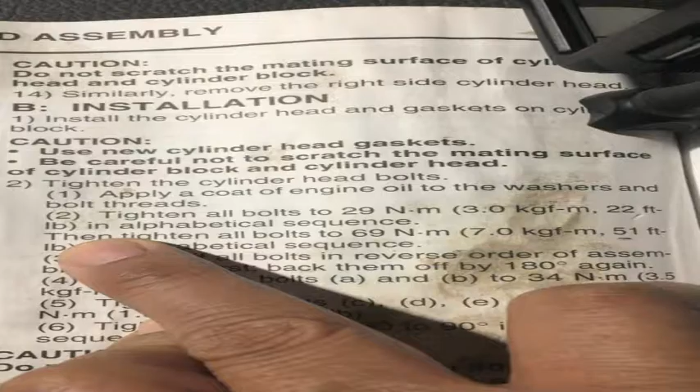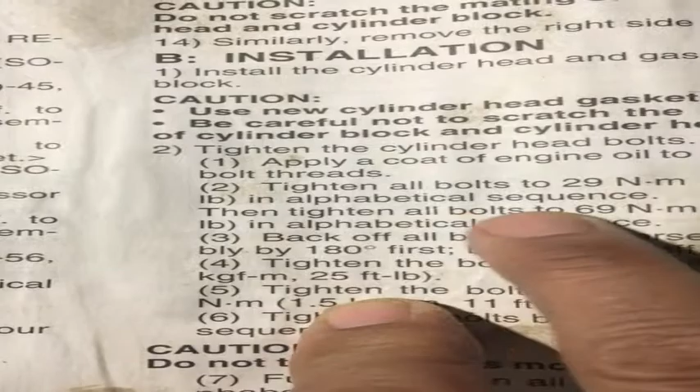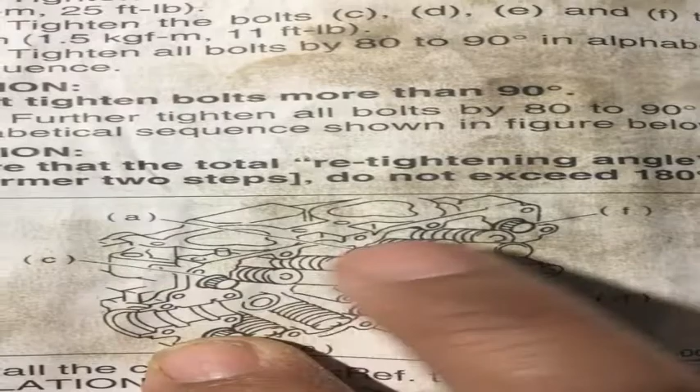Okay, so we've tightened them to 22 foot-pounds in alphabetical sequence, and now we move to the next step, which is tighten bolts to 51 foot-pounds in alphabetical sequence. So that's 51 foot-pounds. Okay. So this is again the alphabetical sequence A, C, and F. So there's 1, 2, 3, 4, 5, 6 head bolts,

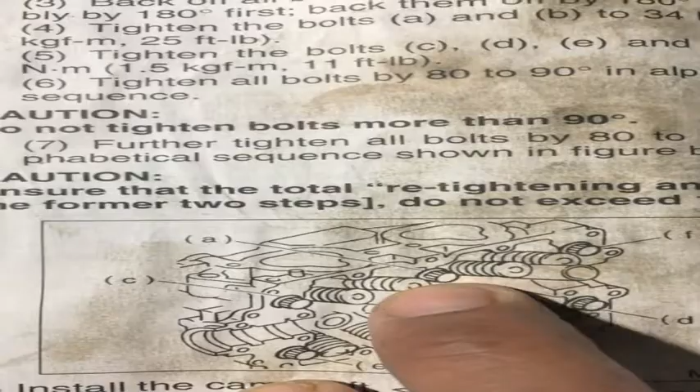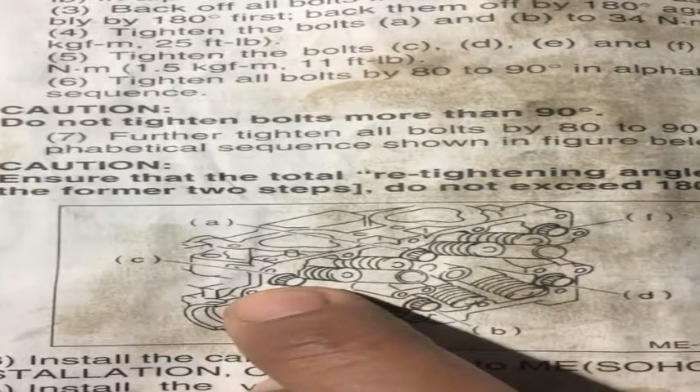12-point bolts. Okay. So there's A, and then we have B, from the top middle, bottom middle. Then we go to top left. Then we go to bottom right. And then you go to bottom left and top right. That's the sequence. All right, let's do it.

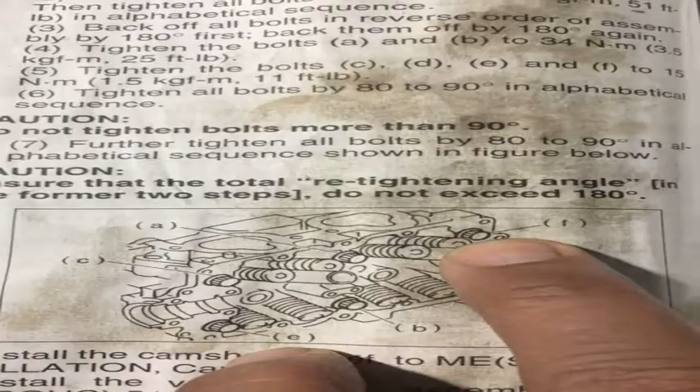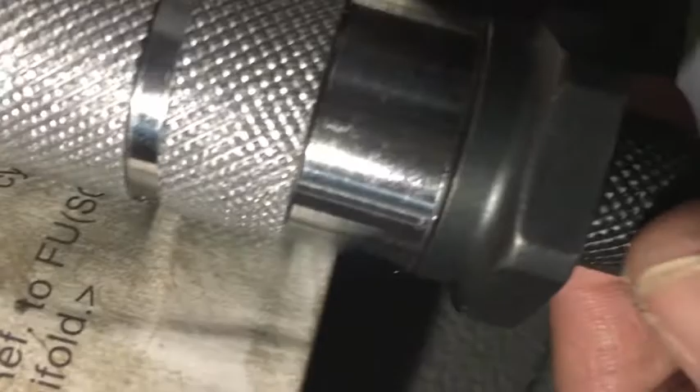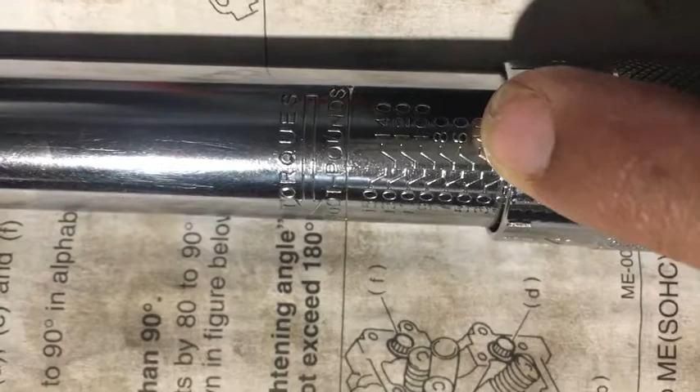51 foot-pounds. Okay, so we're going to adjust the torque wrench to 51 foot-pounds. And we're going to start by turning this little knob to loosen it. This way. Lefty, loosey. So we turn it this way. And then we're going to look for the 50 on here. And see here, it says 10, 20, 30, 40, and 50. So there's a line right there, and then it drops, and then it meets that center, this line right here.

So we're gonna run this thing up to right there, and it's gonna be at 0, and then we're gonna add 1. Okay, so let me do it and then I'll show you. Okay, so is that correct? It's a test for you guys. No, because it's not there. It's at 40 and then 9. So we gotta turn it a few more times until it's up to that line right there. Okay, I'll be right back.

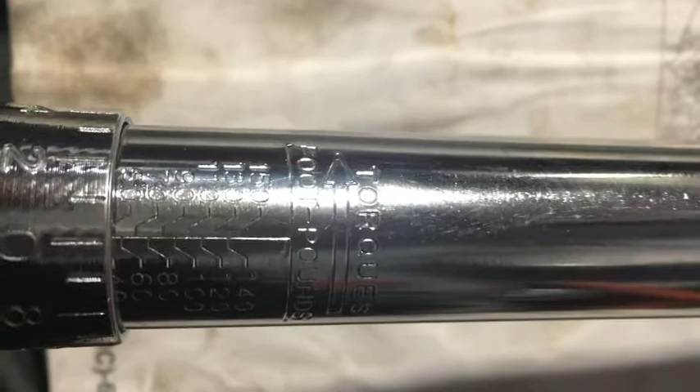Let's turn it. Okay, so are we there? Let me see. 50. And there's a line. We're right on top of it. We're at 0. So we need 51. So we're going to turn it, that notch right there, to line up with that line right there.

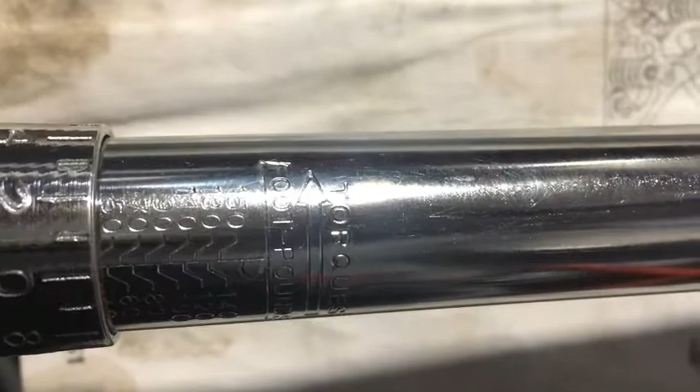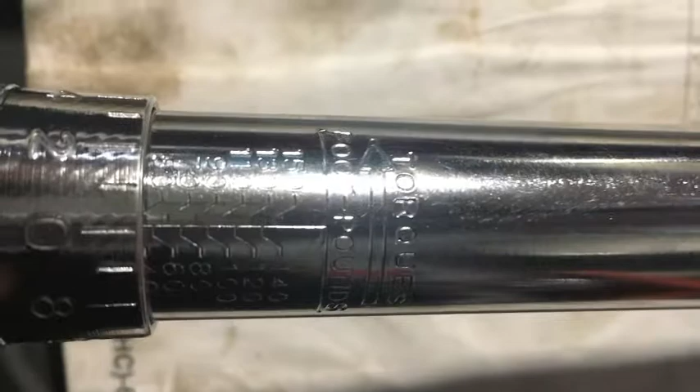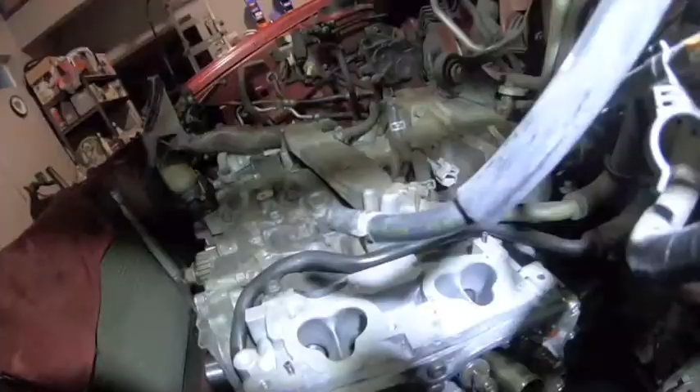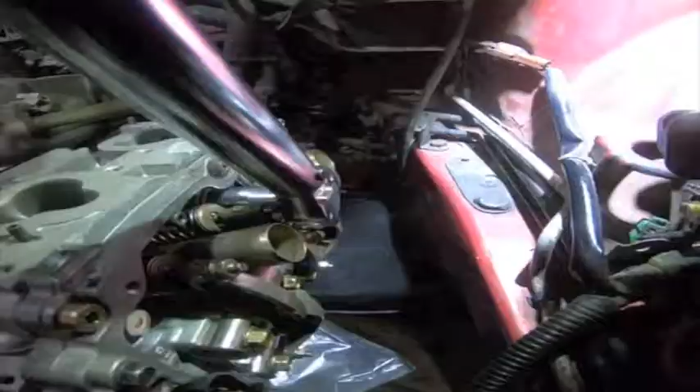Okay, so there we are. We're at 50 and 1. And now we can turn this way, to the right. I need both hands. To the right. Click. That's it right there. 51 pounds on A. Let me get an extension for the bottom. Extension.

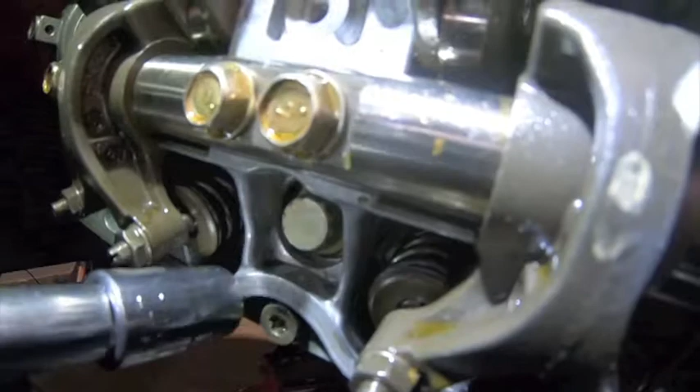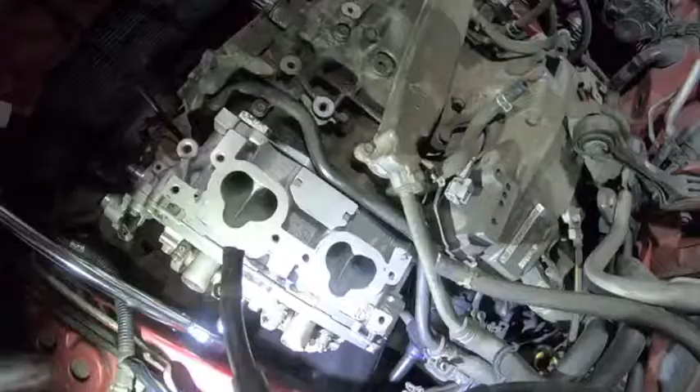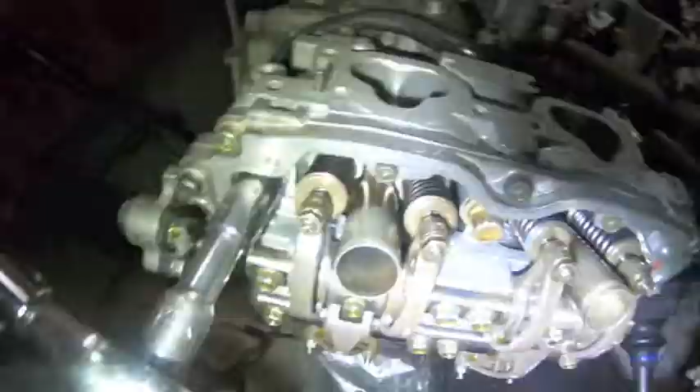Okay, now we're going to torque that, which is B bolt, to 51 pounds. And I'm going to need both hands. There's a click. Okay, so now we go to C. Upper. Here. Okay, that's going to be C. That red bolt right there. That's already at 51. Oh, no, it's not. There we go. Click. Okay, now we go to D.

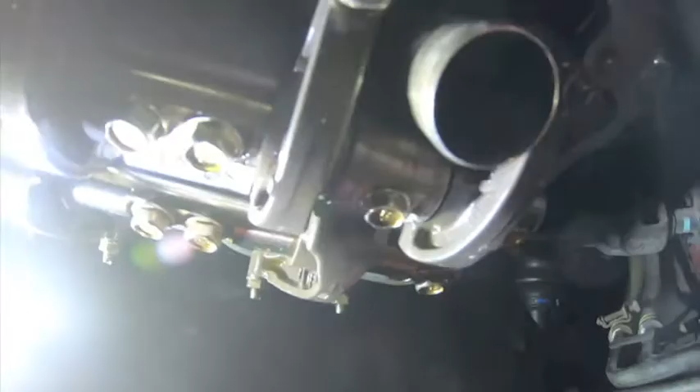Okay, now we're going to D. Right there. So we're right here. And we're going to the bottom right, which is D bolt, that red one. Trying to get the light right there. Okay, we're going for that D bolt, which is the bottom right. I can't use the extension. Okay. Here we are. And even though you can't see it, I showed it to you, it's that red bolt.

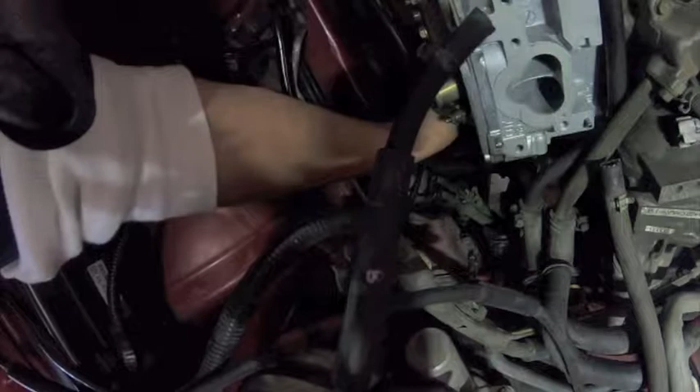Not a lot of room here, but making it work. Okay, we're almost there. I wish I could use an extension, but there's no room, so let's see. It's down here. It's just by feel now, because I can't see it. And it's right here. What happened to my little light? Oh. It's all by feel. Like that. Think we're there. Okay. We're there.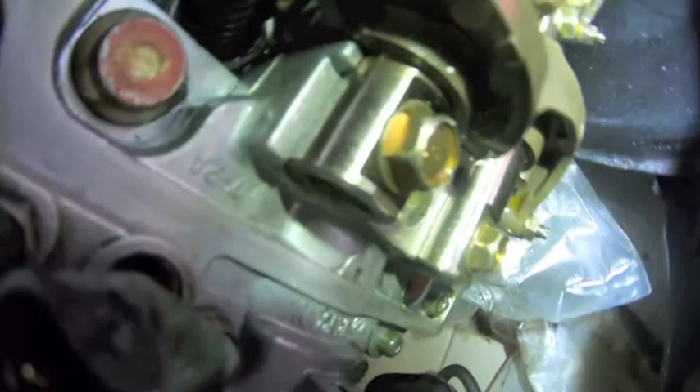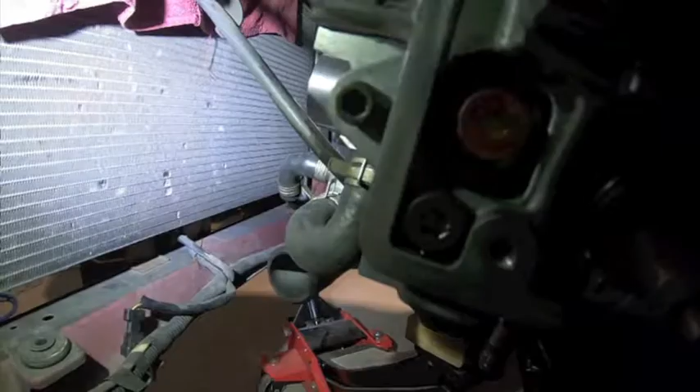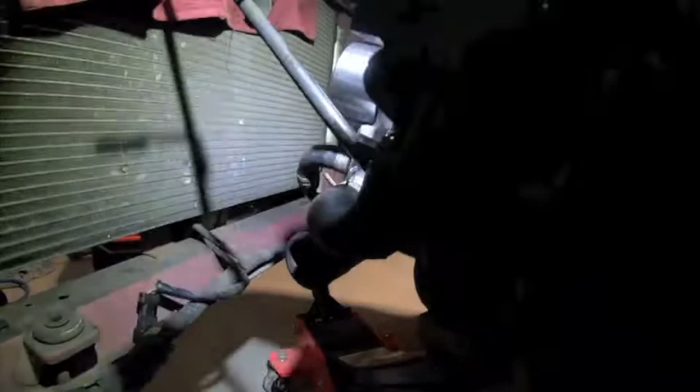Now we're going to move to the lower left, which is E. So you're looking at the head, and it's going to be the lower red bolt. Need a little bit more light. So there it is, right there. Okay. Let's see if I can adjust the light. Right there. Right there. Did you see that? Put the camera, get it out of the way. Tighten that to 51 pounds.

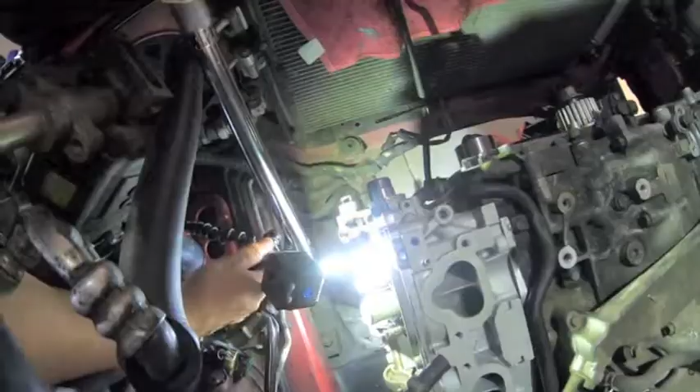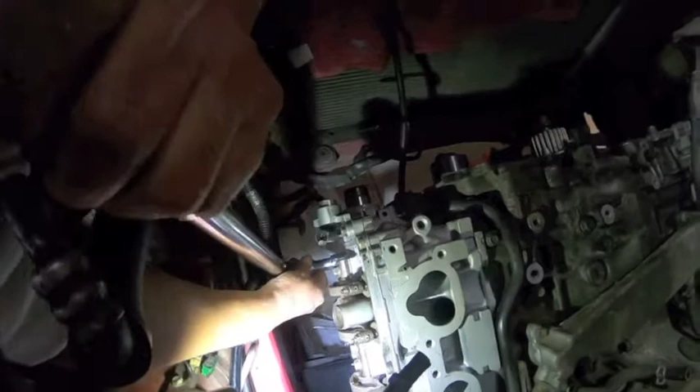Well, you know what? I can use the extension here. I'll put the extension here, and then I'll put it back. And right here. There we go. I don't want the light to get in the way, so I can move it. Constantly have to be moving lights and cameras, try to get good shots for you guys. So, tightening it. There we go. Click, click.

Get this out, and then we're going to do the last one, upper right. Okay. I'll swing it higher. Change the directions of the wrench and put it back. I'm gonna get a better chance this way. There we go. Okay, click. Okay, so we're done with the 51 pounds.